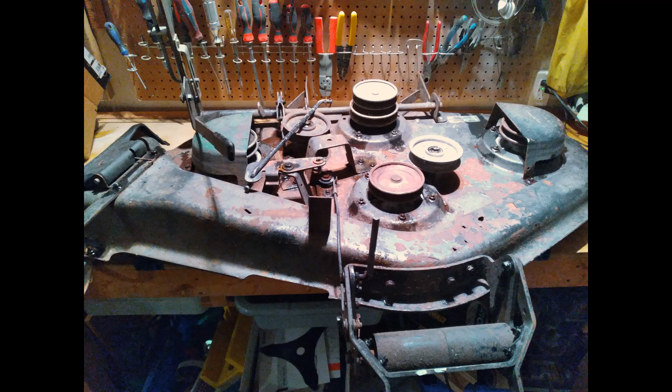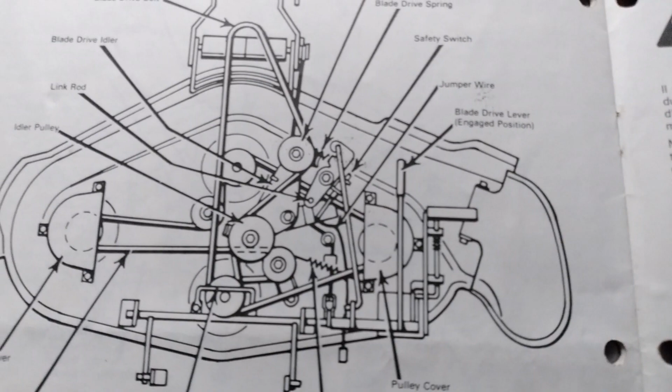So, last episode, I talked about the fact that the mechanism for engaging the drive belt was missing, and I really didn't need it. But there's part of that mechanism that's just there for tensioning the drive belt. And thinking about it more, I figured I'm at least going to need a tensioner.

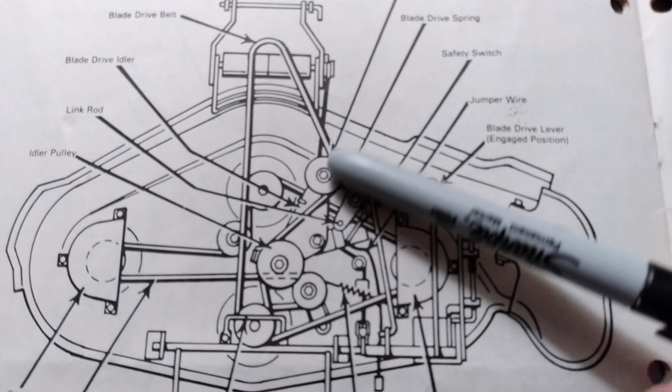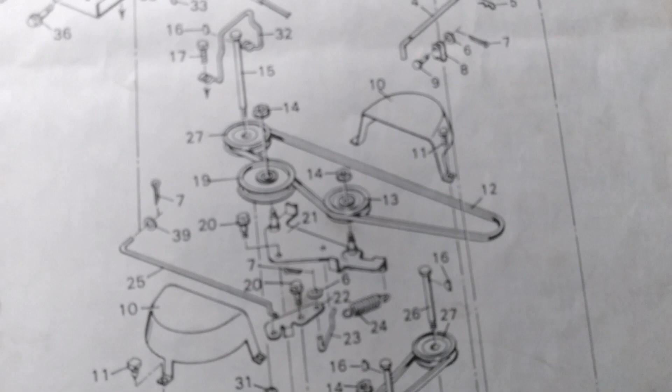So the tensioner is this triangular plate with two pulleys that's pulled back by a spring over here. This puts tension on the drive belt. If we take a look from the exploded view, a closer look at it, we can see this plate here, basically triangular, with a point for attaching the spring. It also has incorporated the belt guides.

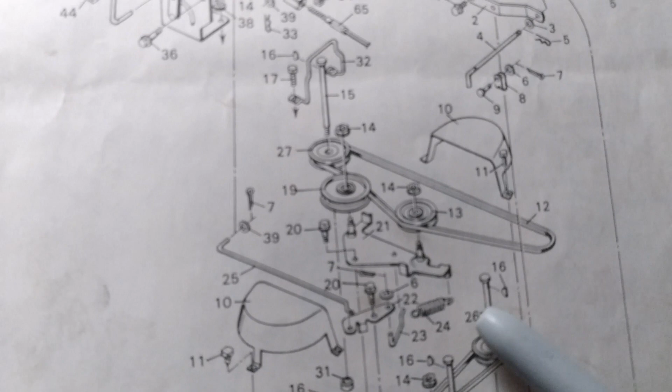So I figured I can order the pulleys off of eBay, and I can try and manufacture this plate.

So here's the beginnings of our belt tensioner. Started off with a quarter-inch steel plate, and we marked the points with a punch where the holes are going to go, then traced out the pattern.

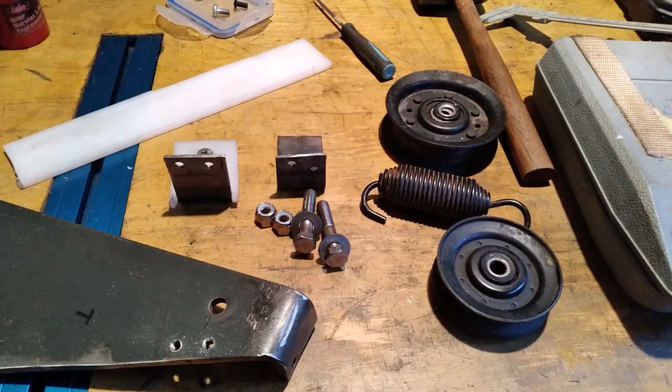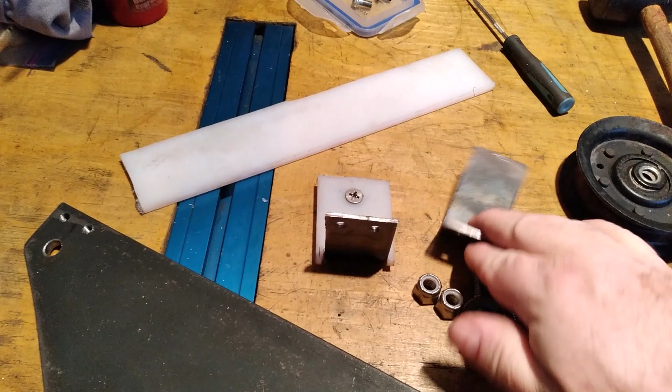Well, a couple of parts have arrived. So I've got my two pulleys, a spring, and I'm creating some keepers, some belt keepers. What I'm doing is tapping a hole in the back of the keeper, and using this low friction material to act as the backing of the keeper. So if the belt rubs against it, it'll slide quite easily.

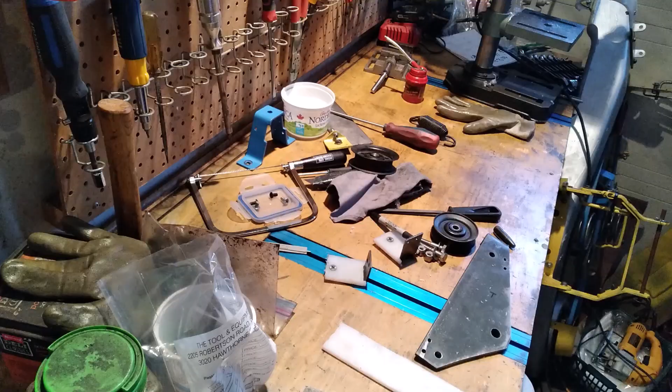My plate is done, so I'm going to finish the last keeper and then put it all together, then take it apart to paint. Alright, so I'm ready to put everything together.

When I'm ready to put it together after painting, I'll use some Loctite on the nuts, to make sure they stay in place.

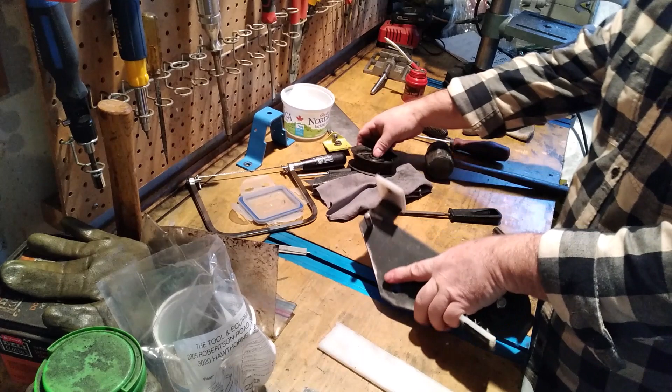Once I have it finished, I'll tighten these lock nuts down and trim them off. I also think I'm going to trim off my angle here and move the hole up higher for the spring to fit into. I don't need that much hanging down.

So I'm going to take this apart, get it all painted, and then start working on the additional bracket to put on the deck to attach to the other side of the spring, and also to hold another bracket for the lifting mechanism. That'll be next.

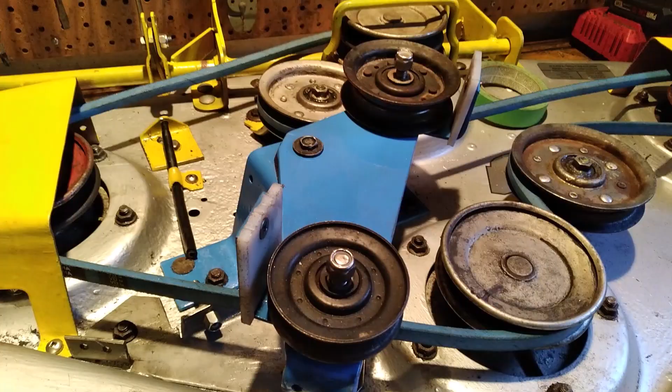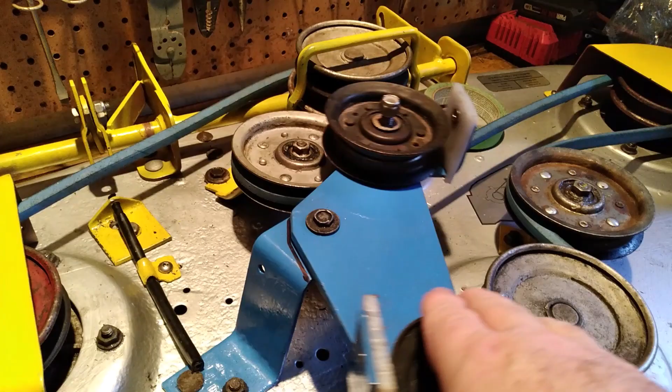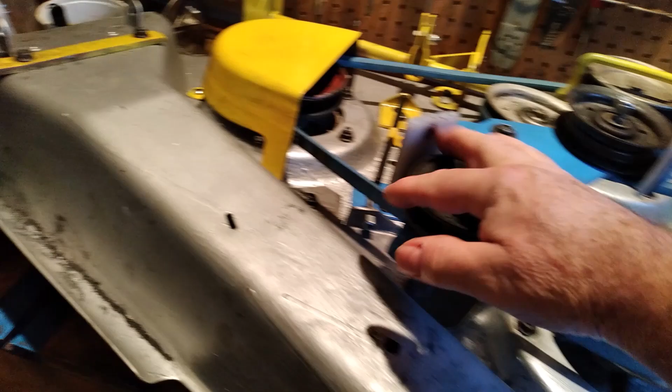So I've got the belt tensioner all painted and installed. You can see how it pivots back and forth, taking up tension on the belt. So the belt will run from about here. This is where the PTO sits. This acts as a belt keeper for the PTO. And then it'll run through this pulley, then through this one, into the main drive, then back this way.

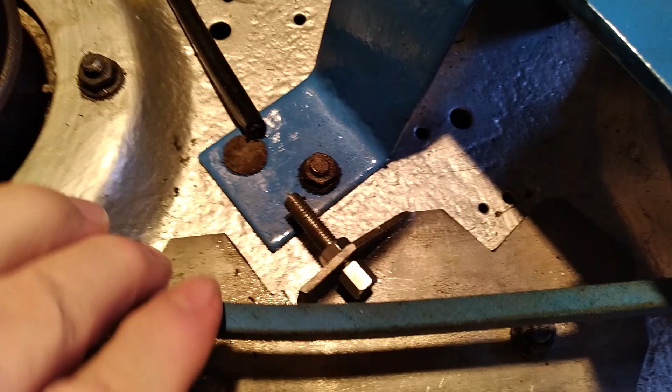The holes for the spring, I've got two holes for the springs, and I've created a plate with, again, two holes attached for the spring to line up with. And this plate also has a cable tensioner, and that is going to be for the lift mechanism.

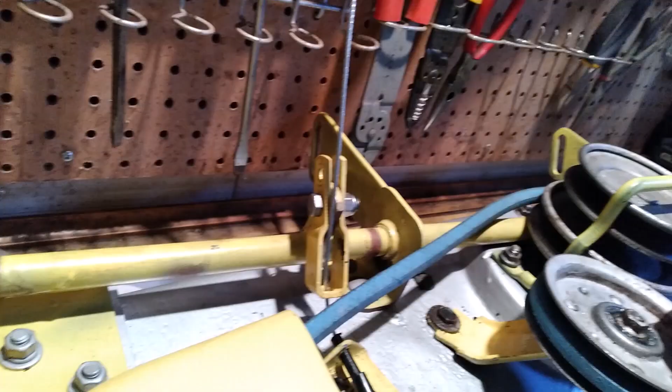So what I'm going to do now is temporarily run the cable through so you can see how the lift mechanism works. This mower doesn't have a nice scissor lift system. What it did have was a cable that was pulled by this mechanism here that's activated by the large handle here that goes back and forth and locks into place. It lifts both the back end and the front end.

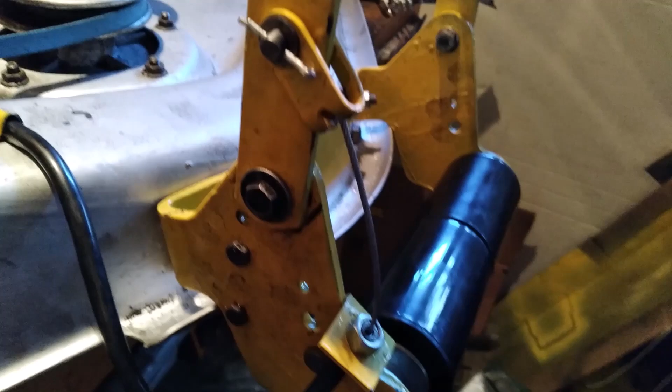And the solid cable used to run through a series of pulleys and guides and come through to the front of the mower deck, where it pulled down here and would basically close the gap here that would be lifting the mower. I replaced this with a clutch cable, so I've had to make a couple of stops.

Then the cable runs over to a tensioner so that if the cable ever develops some stretch or slack, I can increase the tension with this bolt here. And I have a bolt with a hole drilled through it that will fit inside this mechanism here to basically hold on to the cable.

So really all that's left to do now is to wait for the 61-inch belt to come in the mail, and it's going to have to wait until spring for me to put it on the tractor and make the final adjustment for the length of this cable, such that when it's resting on the ground, it has a little bit of slack, and then when this is pulled tight, it effectively lifts the front of the mower off the ground.

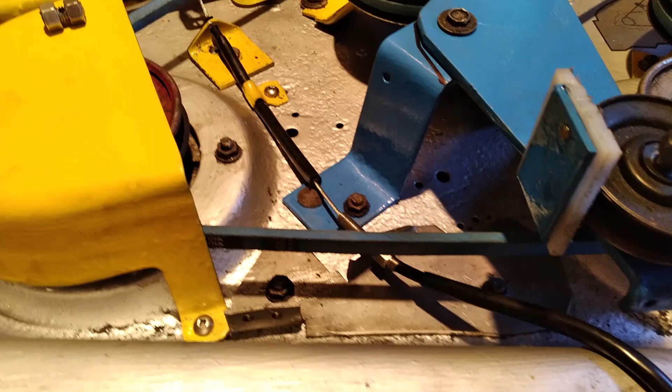So all I really need to do now is just remove the plate, clean it up, give it a good primer and a coat of paint, and then that'll be done, and the spring will have to be installed. But I'll wait until I get the belt, because I'm going to have to remove this mechanism to get the hooks of the spring in.

As well, I've got to remove the pulleys just to get the belt on. And then once the belt is on and the spring is in, I can mount it onto this and tighten everything down. Then it's a matter of installing it on the tractor, and in the springtime I'll shoot a quick video of using it to mow some pasture.

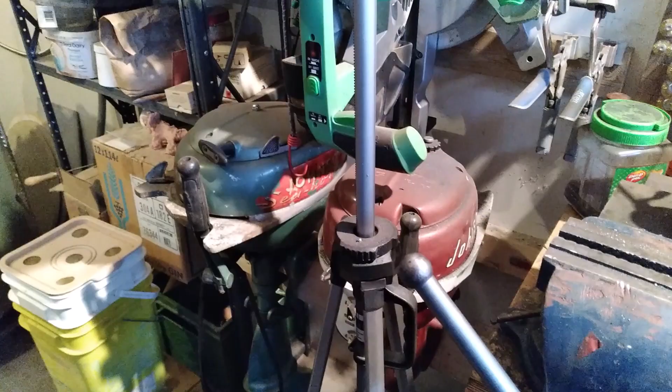Thanks. Next up on tap is going to be one of these two. I still don't know which one. It's either going to be the '56 3 horsepower Johnson or the 1951 Johnson 5 horse. We'll see.